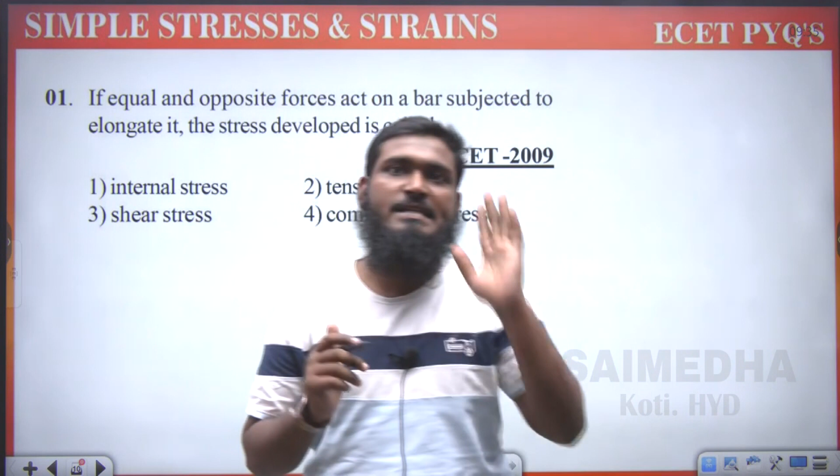Hello everyone, this is Mohammad Inayatullah from the SAIMEDHA Coaching Center Koti, Hyderabad. In this video we are going to discuss all the previous ECET questions, previous year questions, on the topic simple stresses and strains.

In this first chapter we have taken the topic simple stresses and strains, and we have also taken all related topics such as temperature stresses - what are thermal stresses and strains - as well as complex stresses and strains. Those questions will also be covered in this topic itself. So, let us start with simple stresses and strains questions.

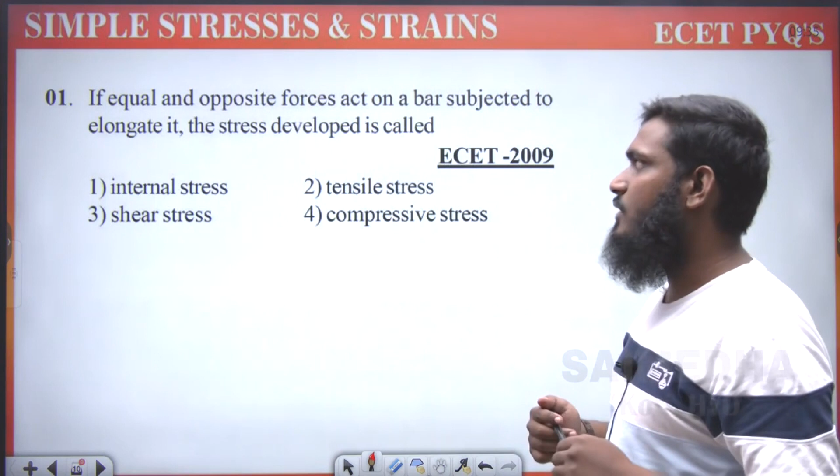The first question is: if equal and opposite forces act on a bar, subjecting it to elongate, the stress developed is called what? Suppose we have taken a bar or a body, and we are applying equal and opposite forces on it - one force applied on the left side, and an equal and opposite force on the other side. If you are applying equal and opposite forces on the bar, which type of stress will be developed?

We have to remember only one point here: whatever loads or forces we apply on the body, if it is trying to pull that body, then it comes under tensile load. Similarly, if we take the reverse - if the load is trying to push the body from the two sides - then it comes under compressive load. But whenever we are trying to pull the body from the two sides, it comes under tensile. So if you have tensile load, which stresses will be induced?

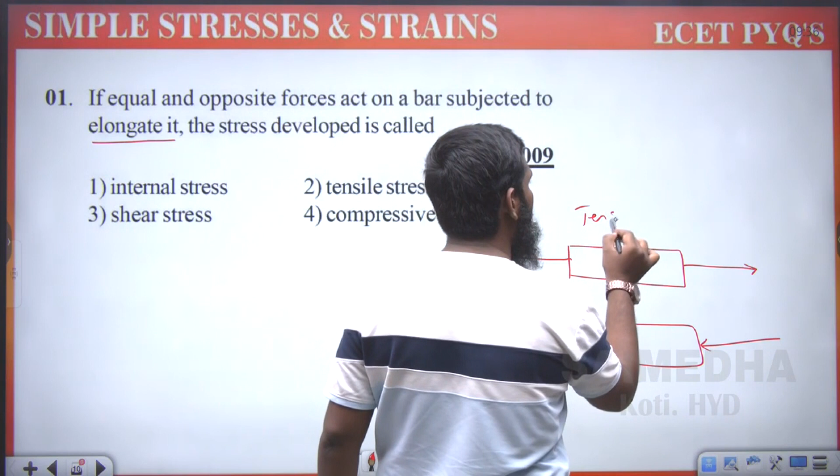Tensile stresses will be developed. Similarly, if you have compressive load, compressive stresses will be developed.

So let us discuss this part. If equal and opposite forces are taken - this force moving in the left direction, and this other force moving in the right direction - two equal and opposite forces - then which type of stress is developed? Directly we can say tensile stress. So option 2 is correct.

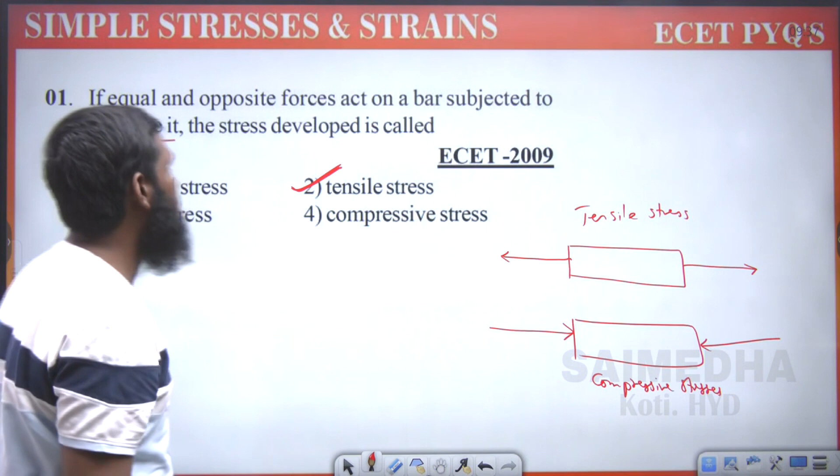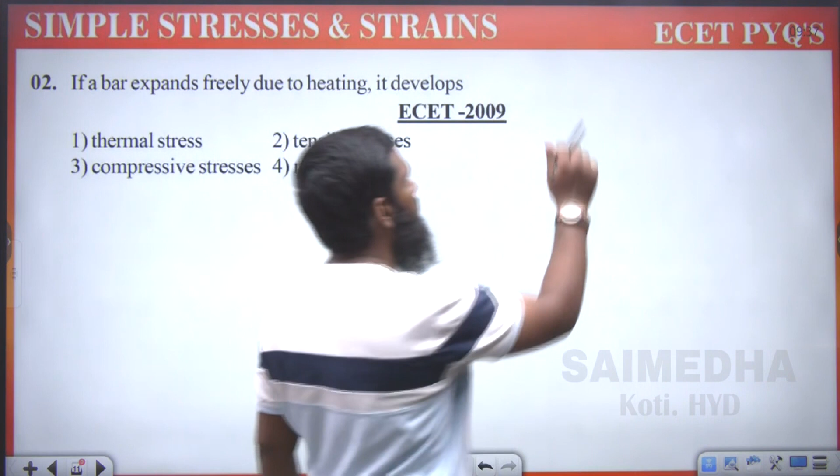Now let us go to the next question: if a bar expands freely due to heating, it develops what? This question will come under the thermal stresses topic - thermal stresses and strains.

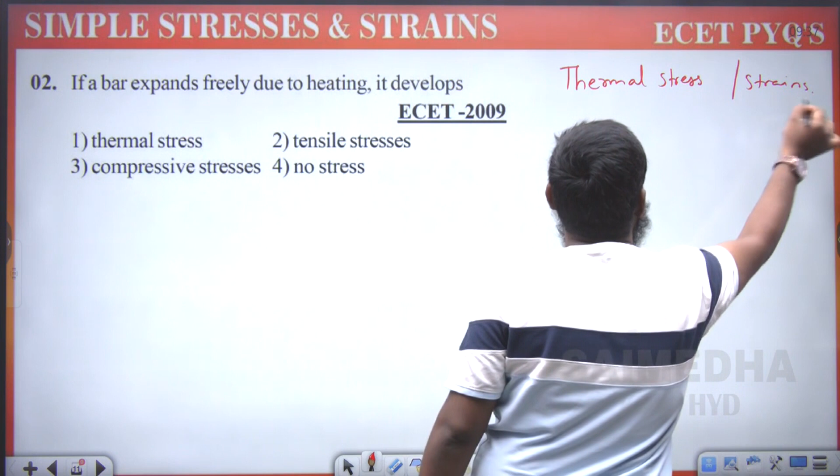Now what is the meaning of these thermal stresses and strains? Now listen here carefully. Suppose we have taken this body over here. Now how are we getting the strain actually? Whenever we are applying the stress, whenever we are applying the load, due to that load stress will be developed. Depending upon that stress, strain will be generated. Strain means what? Change in dimension by original dimension.

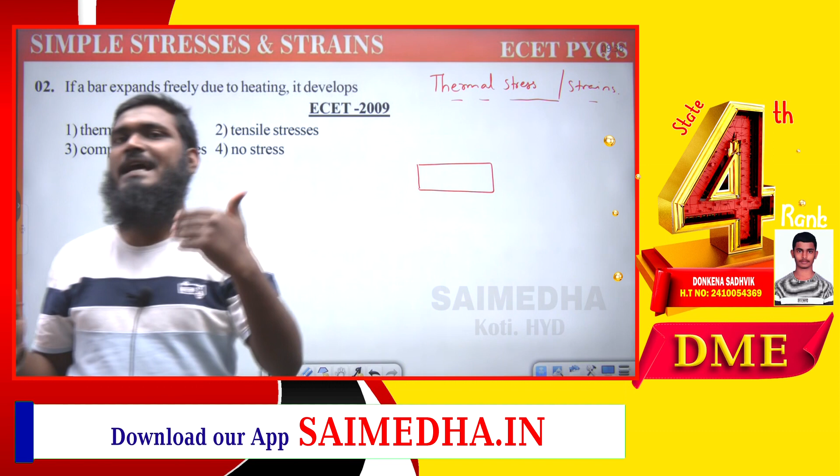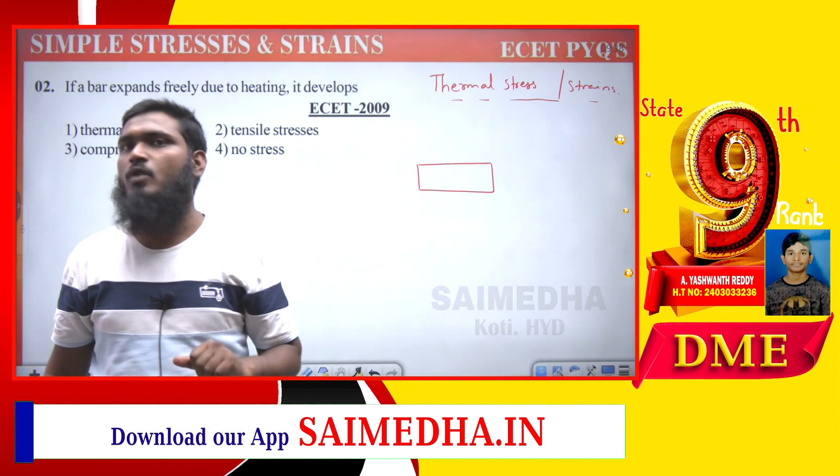So over here, listen carefully to what we are doing. As we know, there is the stress versus strain diagram. In that part we have Hooke's law. Hooke's law means up to the proportionality limit, stress will be directly proportional to strain. Whenever stress is increasing, strain also increases. We have the directly proportional concept there, and that comes under Hooke's law.

But in this, it is not compulsory that whenever the stress is increasing, strain should increase. We are not having that condition. Whenever we are considering Hooke's law, that is the condition: stress is directly proportional to strain. But if you are going out of this content, taking some other content, we are discussing thermal stresses or strain.

Now in this part we are not applying any load over here. If you are not applying any load, we are not having any type of stress. So what we are doing, we are heating this bar. It is given clearly in the question that whenever we are heating this bar or body, due to the temperature changes, we are having strain in the body.

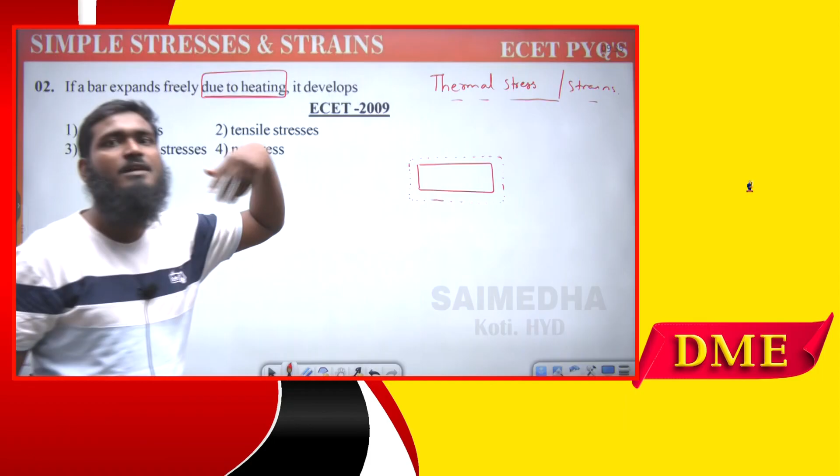What is the meaning of strain now? Strain means change in dimension by original dimension. Whether it is extending or contracting, leave that part, that is secondary. What is the primary point over here? Whenever we are heating that bar or body, due to that heat, the body has strain values. Strain means we have some changes in the dimensions.

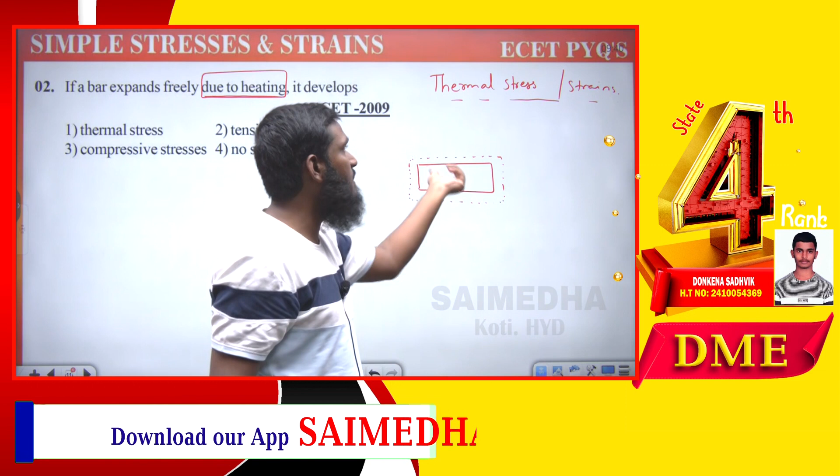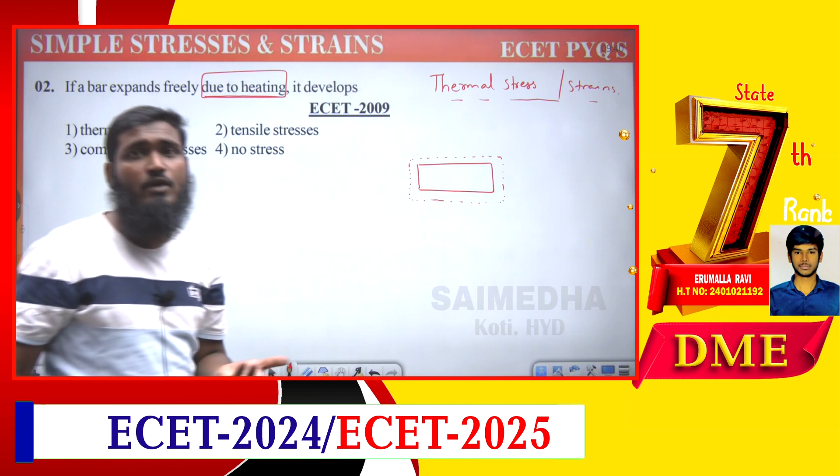So we are not considering any Hooke's law over here. Apart from Hooke's law, this concept comes under thermal stresses. As we are having strain over here, we are not having any stress. So that's why the topic comes under thermal stresses or thermal strains.

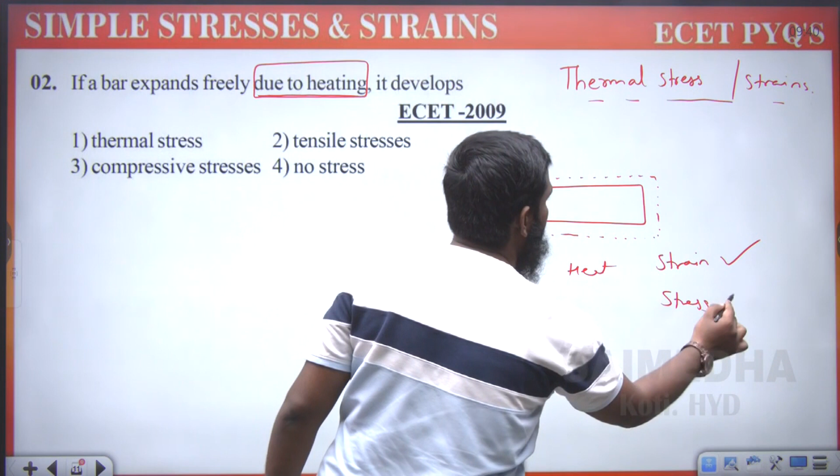So let us see the options we have over here. It develops thermal stress, it develops tensile stresses, compressive stresses, no stresses. Just now we discussed that whenever we are heating this part, we are getting only strain, but we are not getting a stress value. We are not getting any stress, so we can write: it develops no stress.

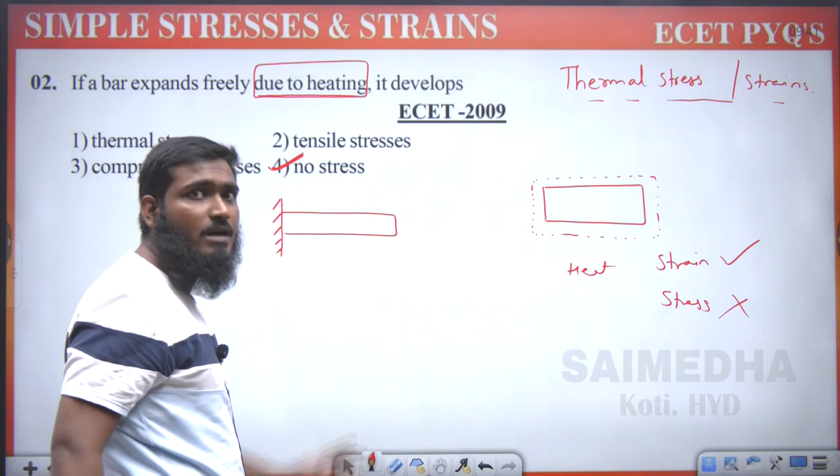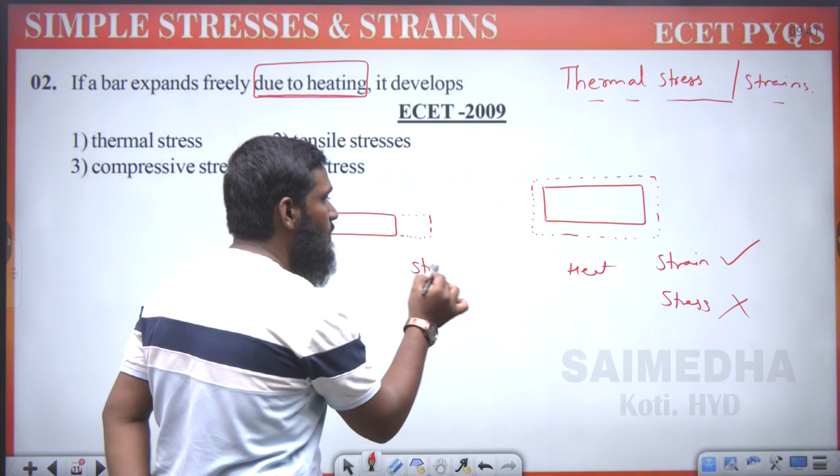So whenever we are heating this, the bar or rod is trying to change its dimension. Whenever it has changes in the dimensions, we can say strain has some value. Strain is not equal to 0, but stress is equal to 0 in this context we have taken.

Now what is happening means, suppose we have taken a rod, but that rod is fixed at both the ends. What example have we taken? We have taken the bar and it is fixed at both the ends. Whenever we are heating this rod or bar, it is trying to change its dimensions, but as it is fixed at this end, in practice it is not able to make the changes. So it is trying to change the dimensions, but due to this fixed end, it is not happening practically.

So if it is not happening practically, what is resisting there? Due to this part, it is applying some compressive stress over here. Due to that compressive stress, the stress is generating because it is restricting. As it is restricting, stress will be developed, and that is a compressive stress, because if it is trying to elongate, with the help of this fixed end it is trying to contract. Whenever it is trying to contract that rod, we call it compressive stress. You have already learned this topic in the video lectures.

So as an overview, whenever we have a free end, it can elongate. So strain is not equal to 0, we have some strain value, but stress will be 0. But as we have a fixed end, compressive stress will be developed. But in this question, no fixed end or free end is mentioned; what is given is that the bar expands freely. If the bar is expanding freely, we do not have any stresses, only strain. So we can go with the fourth option, which is no stresses.

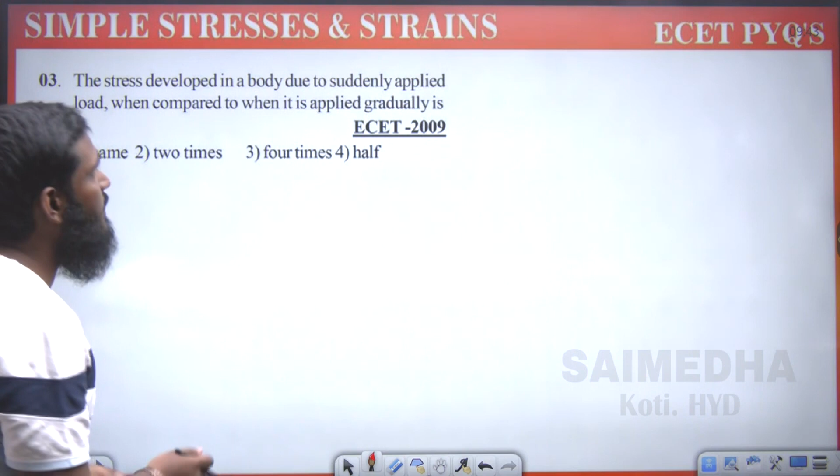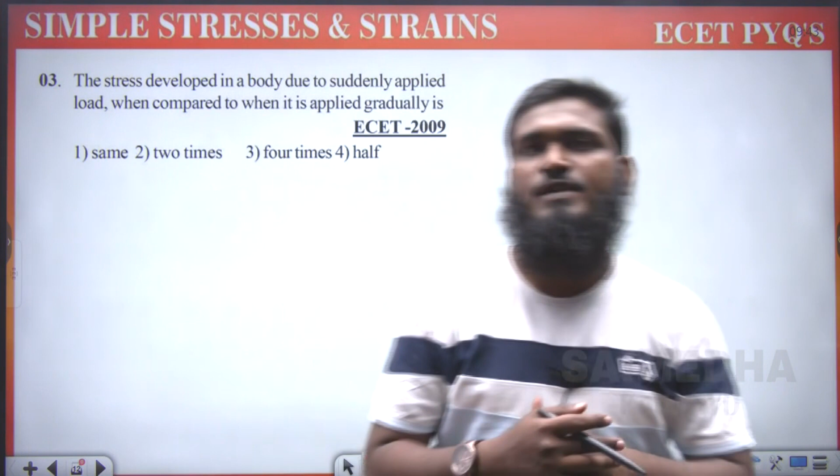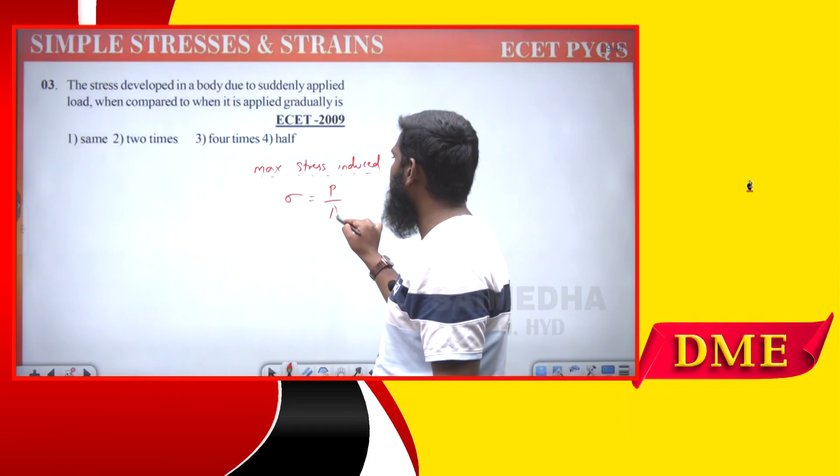Now next part: the stress developed in a body due to suddenly applied load when compared to gradually applied load. We take this topic as strain energy, which we covered in this first chapter. Let us see the maximum stress induced in a body. Listen carefully. In the first case, the maximum stress induced is sigma equals P by A. This is for gradually applied load.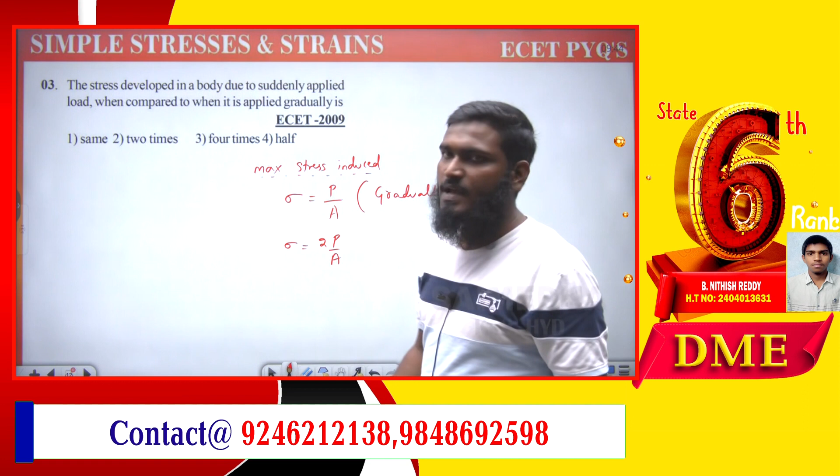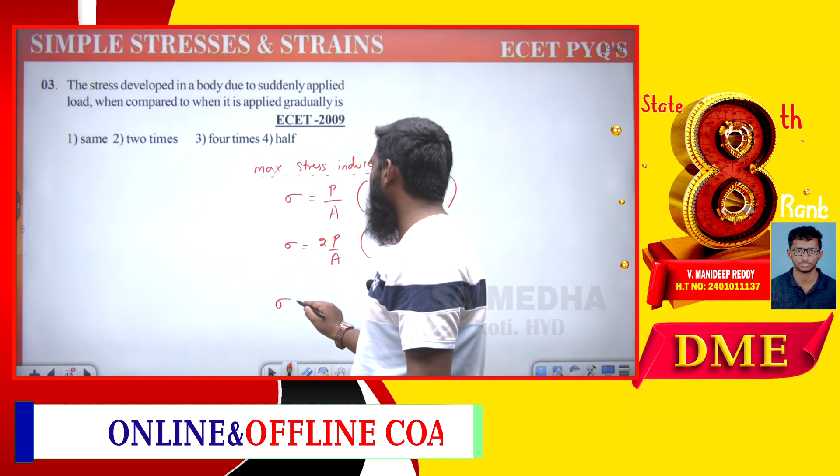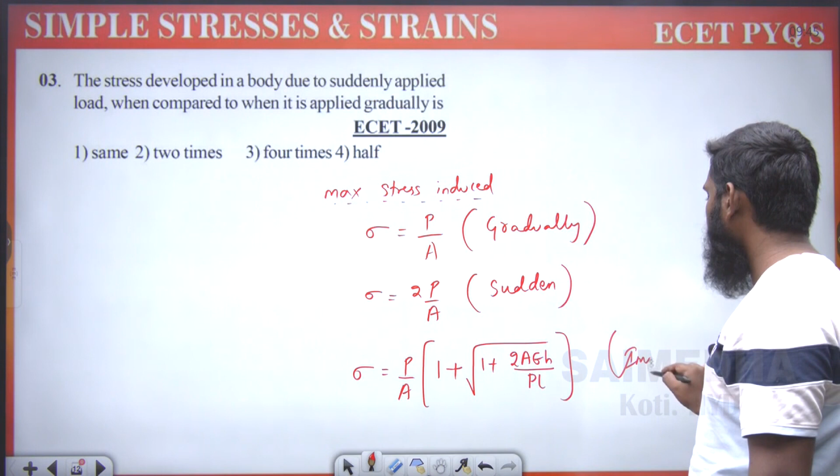Similarly, if sigma equals 2 into P by A, then this is a suddenly applied load. One more formula we have is sigma equals P by A of 1 plus under root 1 plus 2AEH divided by PL, and this formula is for impact load. So gradually applied load gives P by A, suddenly applied load gives 2 into P by A, two times the gradually applied load, and impact load gives P by A of 1 plus under root 1 plus 2AEH by PL.

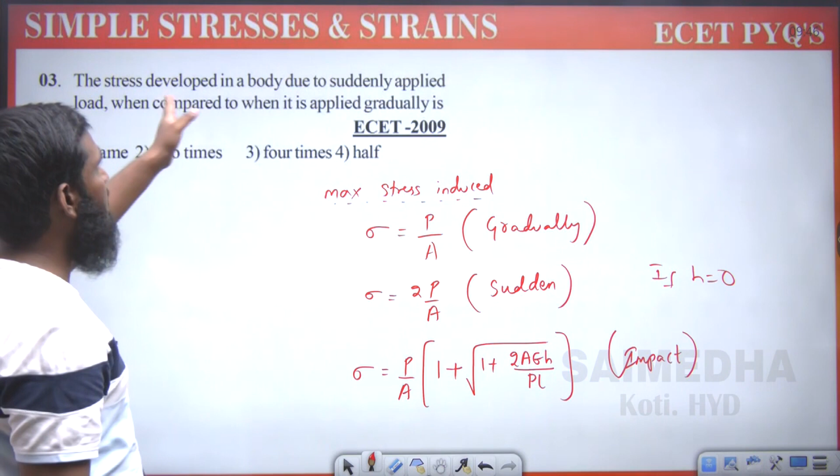Now there is a similarity between suddenly applied load and impact load. Listen carefully. If H equals 0, then 0 into this complete part is 0, 0 divided by PL is 0, 0 plus 1 is 1, root 1 is 1, 1 plus 1 is 2, so we get 2 into P by A. So for the impact load formula, if H equals 0, it becomes suddenly applied load. So in this question, the stress developed in a body due to suddenly applied load when compared to gradually applied load means what?

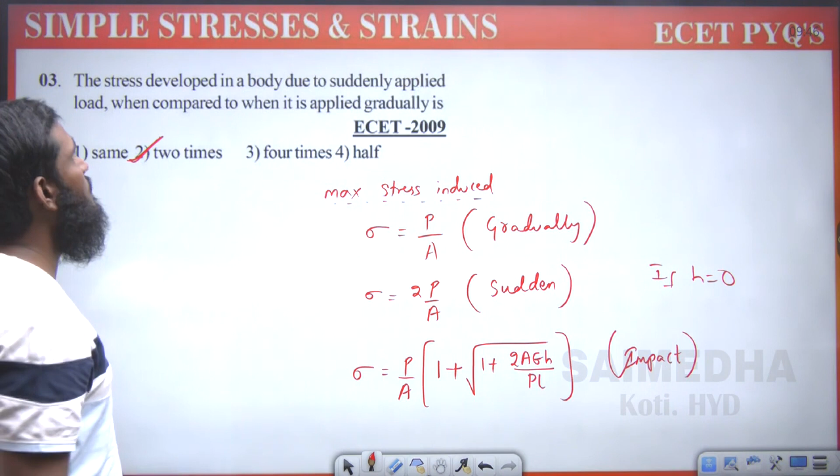Twice means 2 times. 2 times we are taking over here, means let us go with the second option. Second option, 2 times is given over here. So let us go with 2 times the gradually applied load. Okay. So this was the option.

Now next question, breaking stress is. Now what is the meaning of breaking stress actually? Breaking point, failure point, rupture point, we are having this part now. So let us try to discuss over here by using the diagram. Stress strain diagram will be there. By using the diagram, let us understand this part. So breaking stress is less than ultimate stress, greater than ultimate stress, equal to ultimate stress, less than working stress.

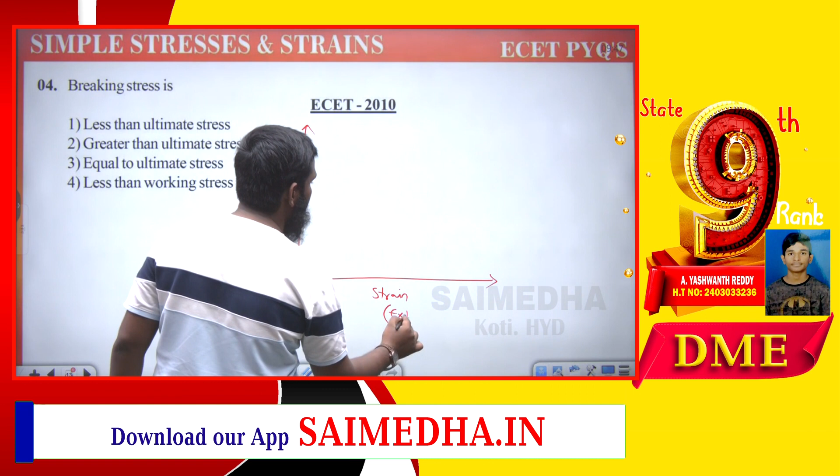Okay. So we have taken this diagram. On the y axis we are taking stress. Stress means we are taking it as load over here. And this part we are taking as strain. Strain means we are taking this part as extension. Now let us draw the diagram. Suppose this diagram we are taking. This is a straight line we have taken. Okay, this is the diagram we have taken over here. So for stress and strain, we are having this diagram.

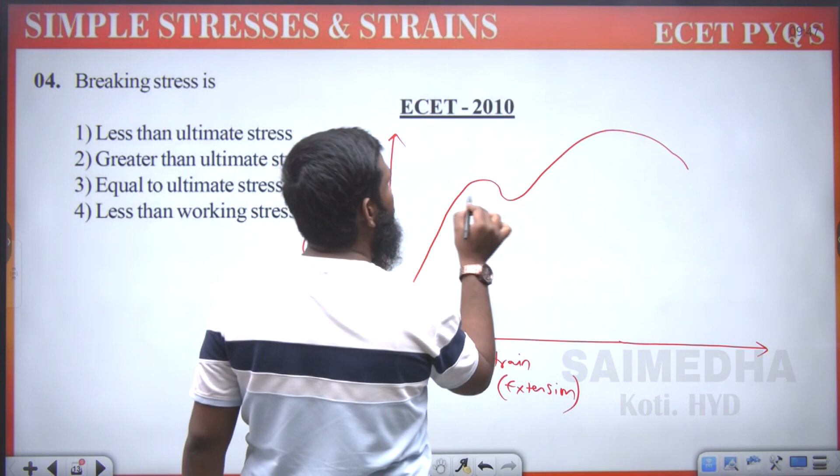Now let us mark the points we are having over here. What are the points we are having? Suppose this is a point we have taken. This is one point, this is one point, this is one point, this is one point, then again this point, and this is the last point. Okay, like this we have taken. So this is A, B, C, D, E, F. Okay, so all these points we have taken over here.

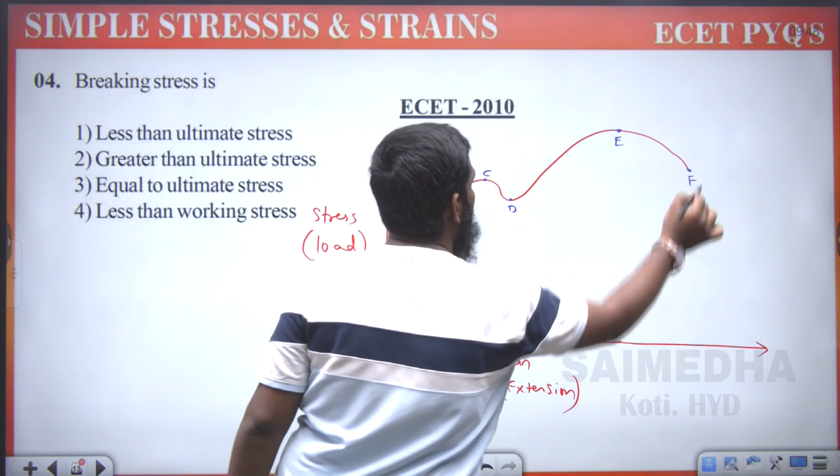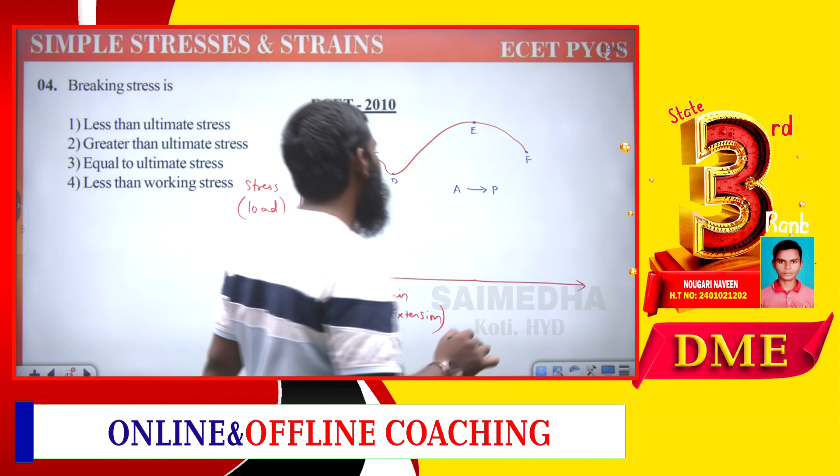Now what is the meaning of these points? So first point, listen here carefully, A point. From O to A, it is looking like a straight line. So whenever we are having a straight line, what is the meaning? Straight line means stress is directly proportional to strain. Whenever the stress value is increasing, strain is also increasing up to the proportional limit. Up to proportional limit, we are calling that law Hooke's law. So up to A we are calling this part the proportional limit. Let us write over here, proportional limit.

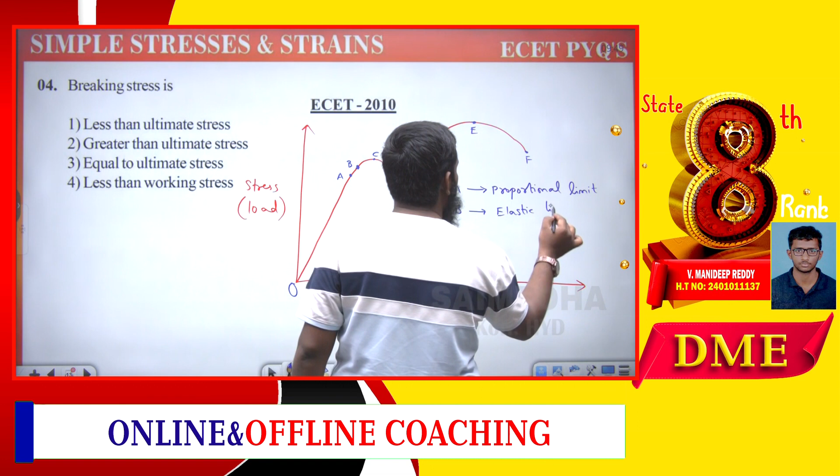Now what is B we are having? B we are taking as elastic limit. Now what is elastic limit? Up to point B, if you are applying the load, stress will be developed. Due to stress, strain will be developed. But after removing the load, if the body is regaining its original shape and size, if it has the capability to regain its original shape and size after removal of the load, then that property we are calling elasticity. So this is the last limit, point B, we are calling it elastic limit.

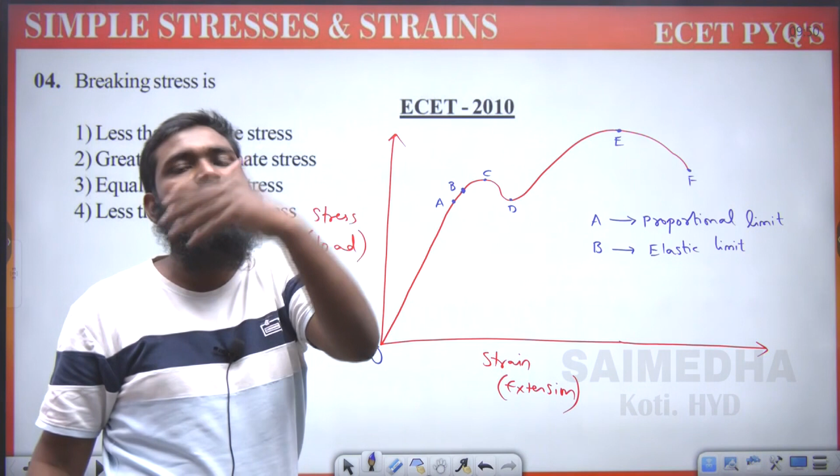In this region, from O to B, if the body is loaded and you remove the load and it has the capability to regain its original shape and size, then we call it elasticity. Means we are calling this region the elastic region.

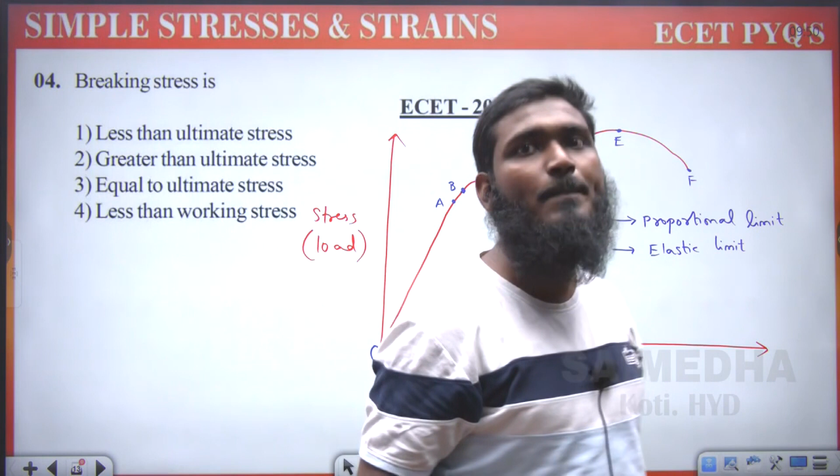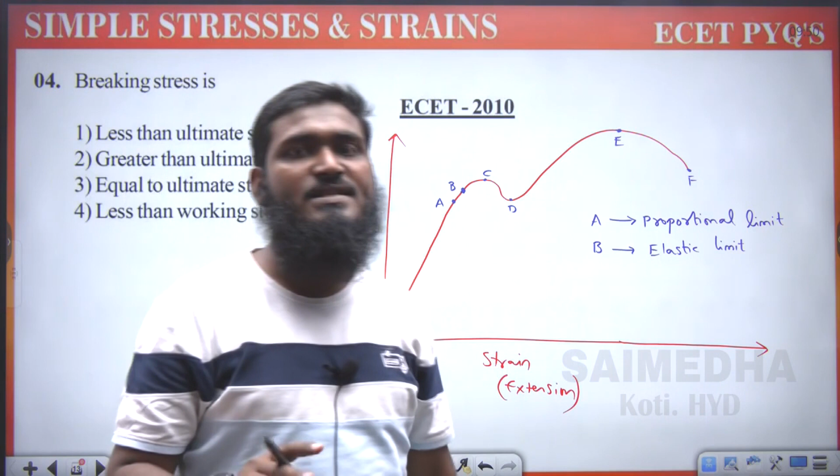Now whenever it is crossing point B, this complete region will be coming under the plastic region. What is the meaning of plasticity? Plasticity means after removing the load also, the body does not have the capability to regain its original shape and size. Then we are calling that part plasticity, means permanent deformation. It will be permanently deformed. So point B we have taken. Now what is point C? Point C we are taking as the upper yield point.

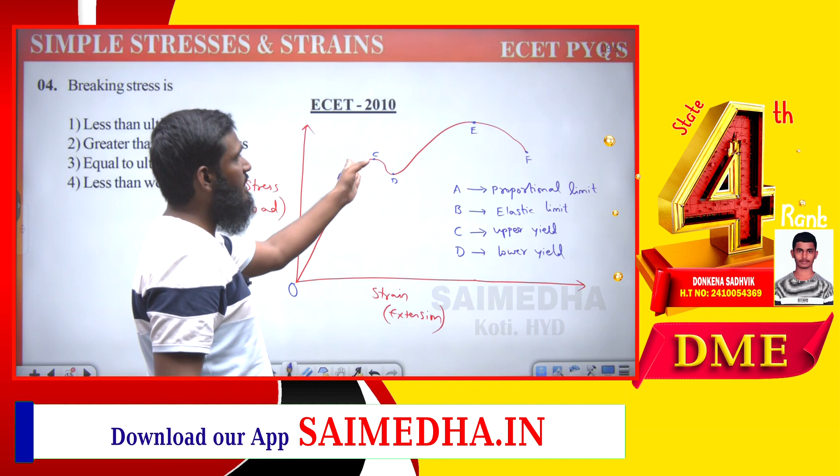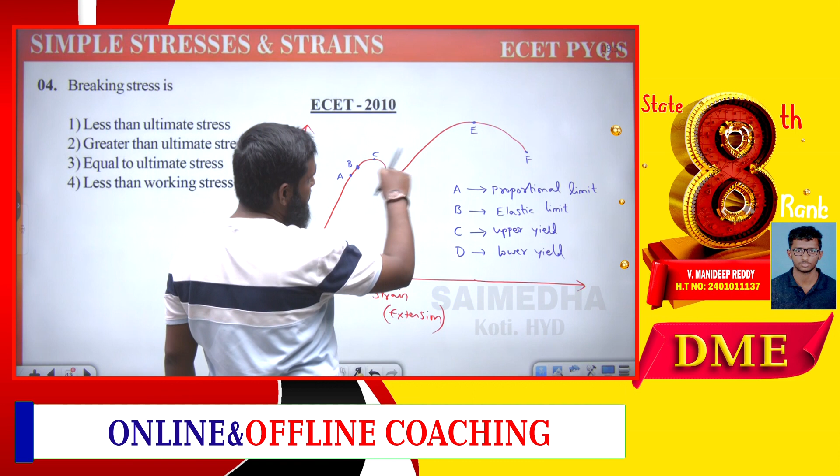Okay, upper yield point or upper yield limit. Now next, D we are taking as the lower yield point. Now after this elastic limit, whenever we go on increasing beyond point B, what are we getting? Yield points. We call this part the upper yield point and lower yield point. We'll be having more increase in the strain here. Even if you decrease the stress, we get more strain there.

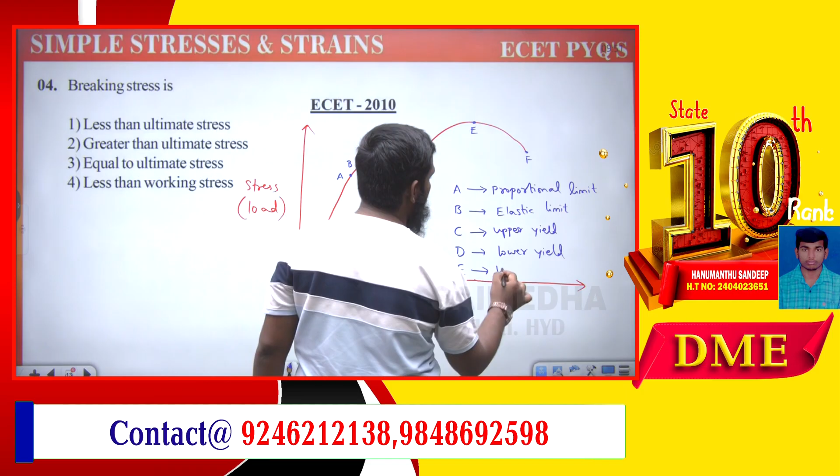Now next we are taking point E. Point E we take as the ultimate point or ultimate stress. At that ultimate point, what are we having? Ultimate stress. Now F we call the breaking point or failure point.

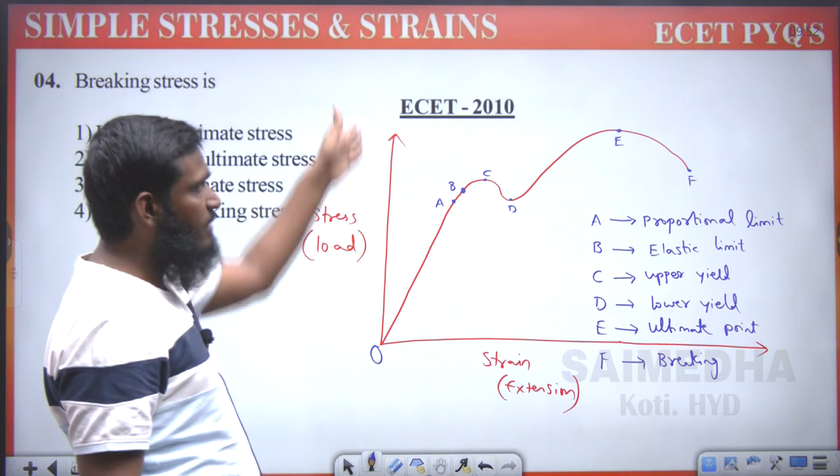Now let us see the question we have here. Breaking stress is... These are the stress values. We start from 0 and it goes on increasing. Now let us see a simple point here. What are we having here? Ultimate stress. So we have the ultimate stress value here.

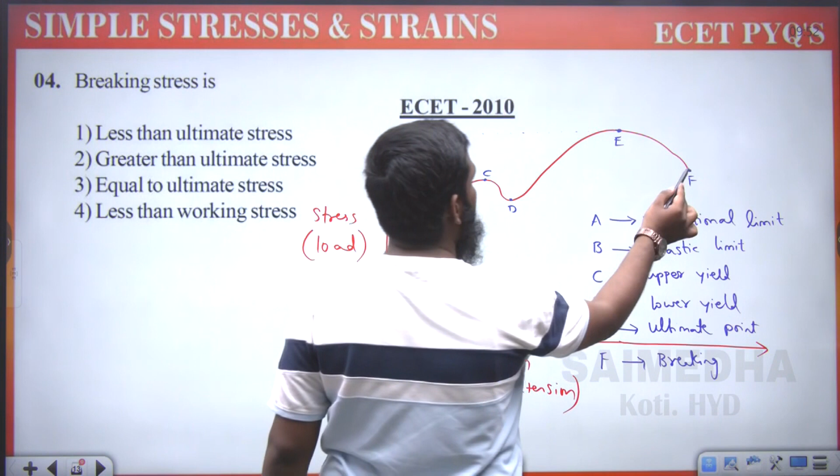And what is this value? Breaking stress. So is the breaking stress value more than or less than the ultimate stress? We can directly see it here. This is ultimate stress and this is breaking stress. So breaking stress is less than ultimate stress. So we can go with the first option: breaking stress is less than ultimate stress. The first option is correct.

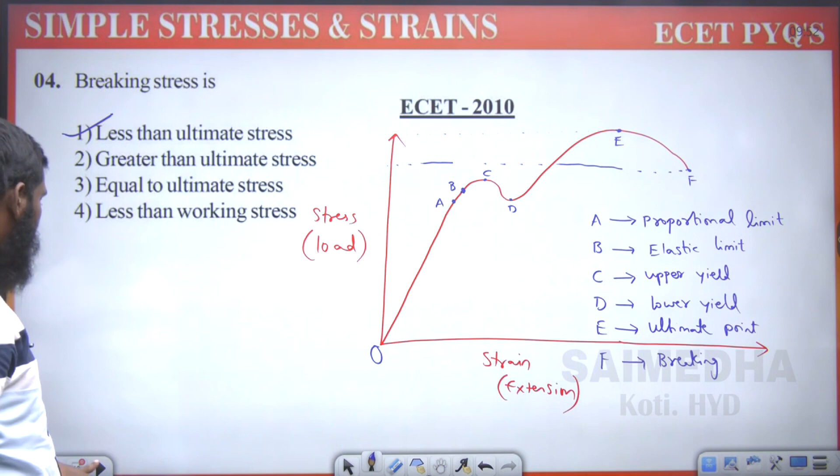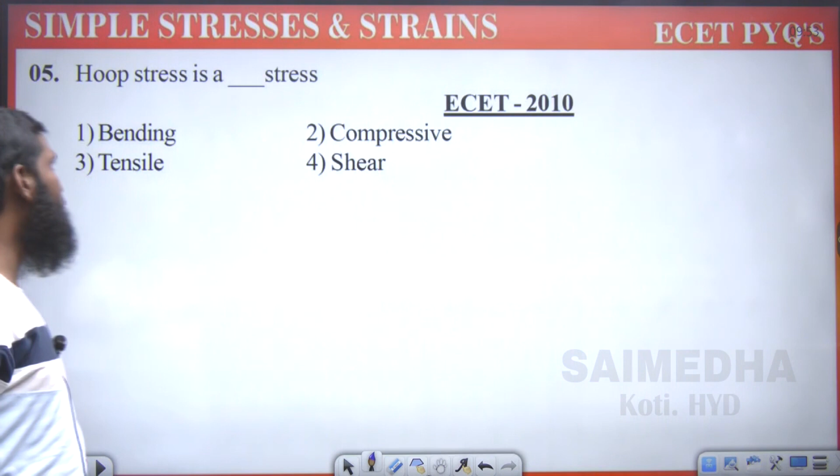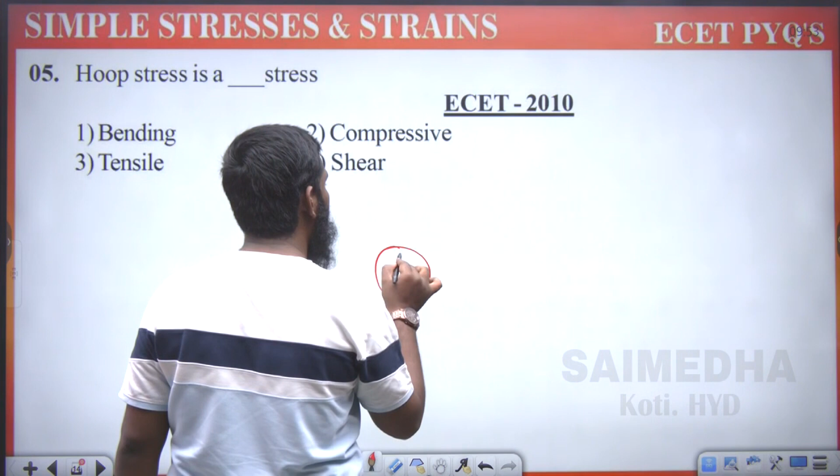Now let us see the next question. Hoop stress is a dash stress, meaning which type of stress? This question is also very important and it is repeated. The options are bending, compressive, tensile or shear. Let us take one example. Suppose we have taken one cylinder, and in this cylinder we are trying to fill gas.

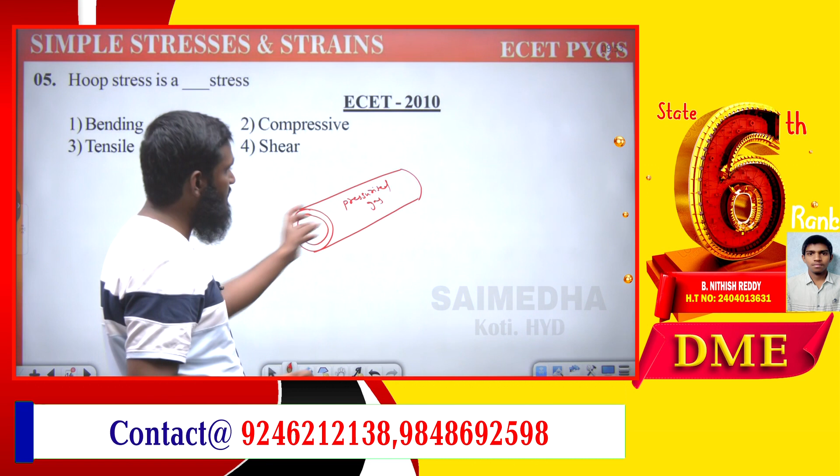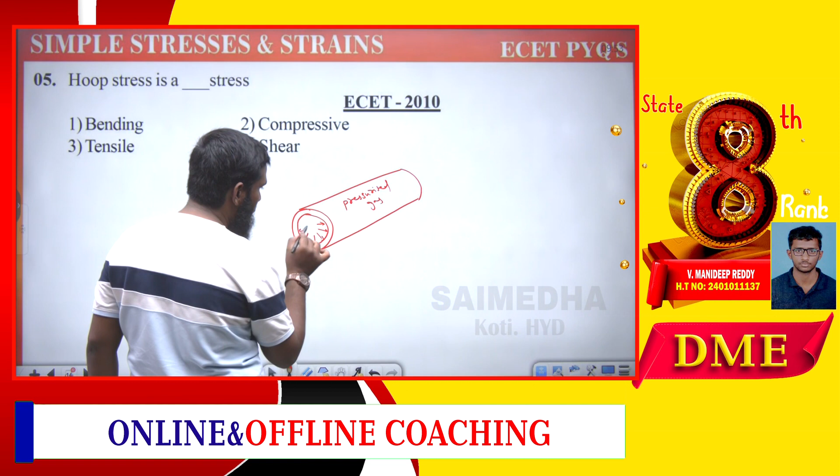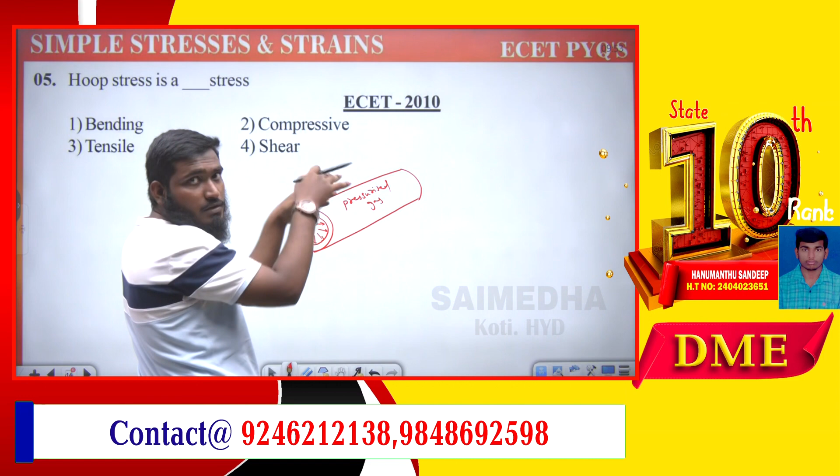Pressurized gas. If you fill the gas in this part, what will happen? Whenever the gas moves inside, it tries to occupy all the space it has. As it occupies all the space, it attaches to the walls, the outer surface, and completely fills up this space. So if you see these arrows here, what is the meaning of this?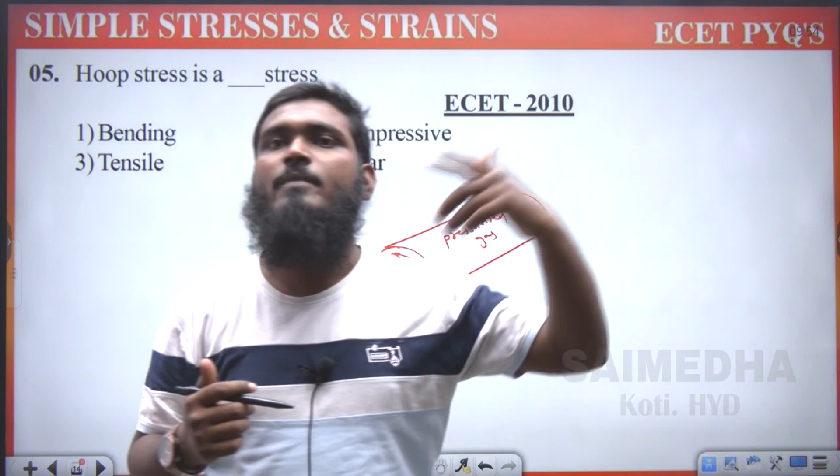It means whenever it is getting filled, it is trying to elongate. Elongation means increase in length, increase in dimension. We get that increase in dimension when we use a tensile load. Whenever tensile load is applied, we have some increase in dimensions. But whenever we apply a compressive load, we get shortening, meaning a decrease in dimensions.

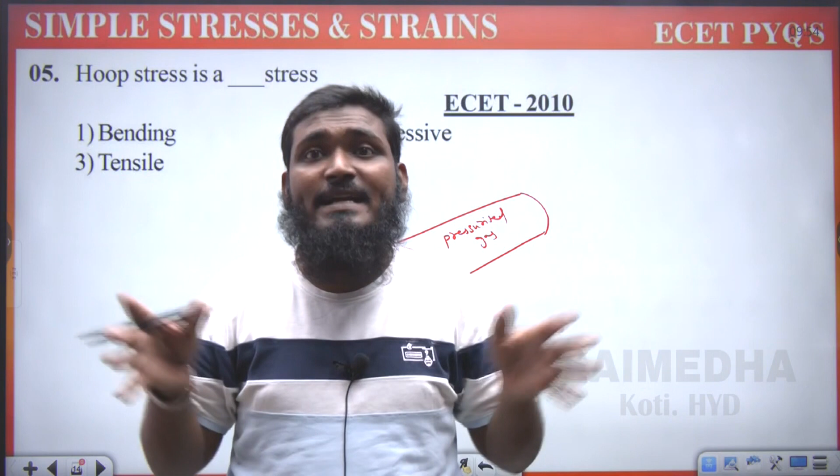So here also, whenever we fill this pressurized gas, the gas occupies whatever space we have and tries to elongate that part. If it tries to elongate, a tensile load is applied. If a tensile load is applied, which stress? Tensile stress. So what do we call this stress? Hoop stress.

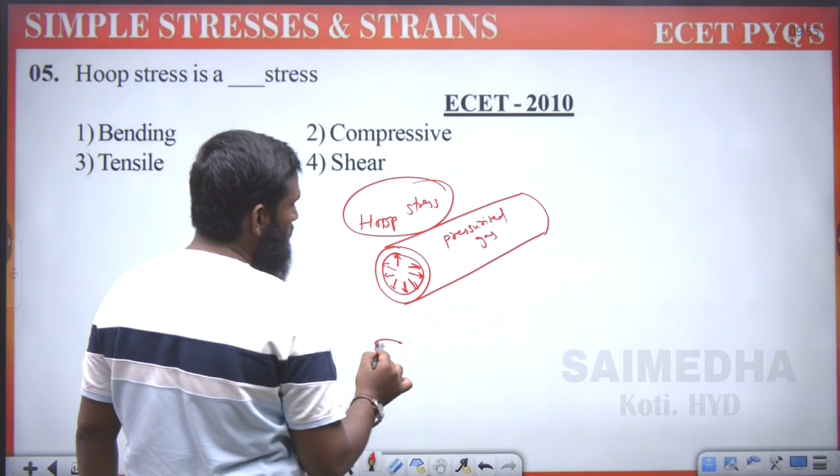Hoop stress, and we are having one formula over here: sigma h, hoop stress, is equal to PD by 2T. Okay, by using the formula also, if you want to find out any value over here, we can find out with the help of this formula, PD by 2T. Okay, now which option will be correct over here for this question?

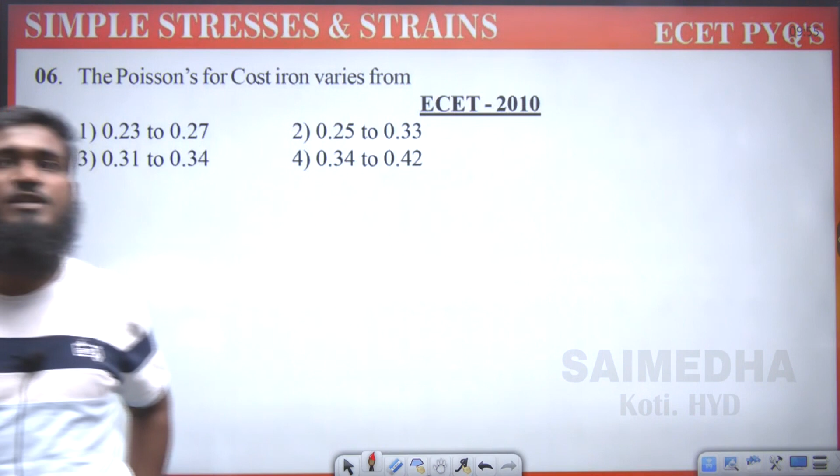Hoop stress is a dash stress: bending, compressive, tensile, shear. Let us go with tensile over here, tensile stress. Okay, so option 3 is correct. Now next question, the Poisson's values for cast iron varies from. Now this is also most important. A number of times the Poisson's value has been asked in the examination. Okay, now let us see. Let us discuss what are the complete values we are having.

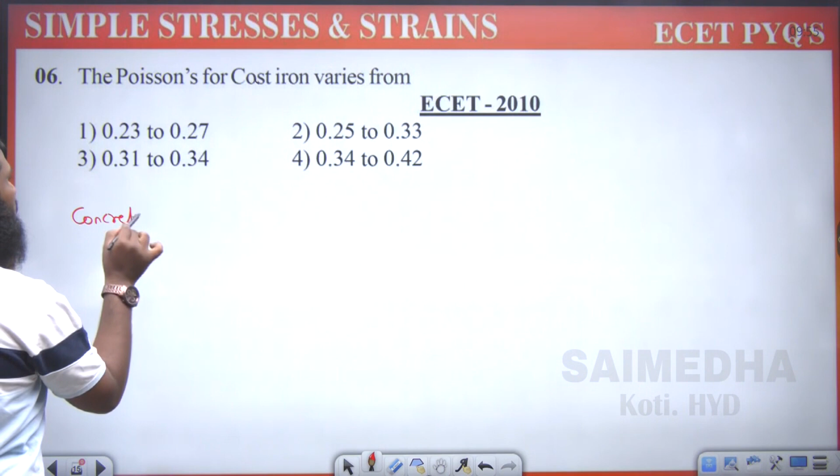So first let us take concrete. For concrete, the Poisson value we are having is 0.2. Okay, what we are having? 0.2. Now next let us take cast iron. If you are taking cast iron, approximately we are having it as 0.23. Okay, this part we have taken. Now next we are taking steel. If you are taking steel over here, this is like 0.25 to 0.33. Okay, like this we have taken 0.33.

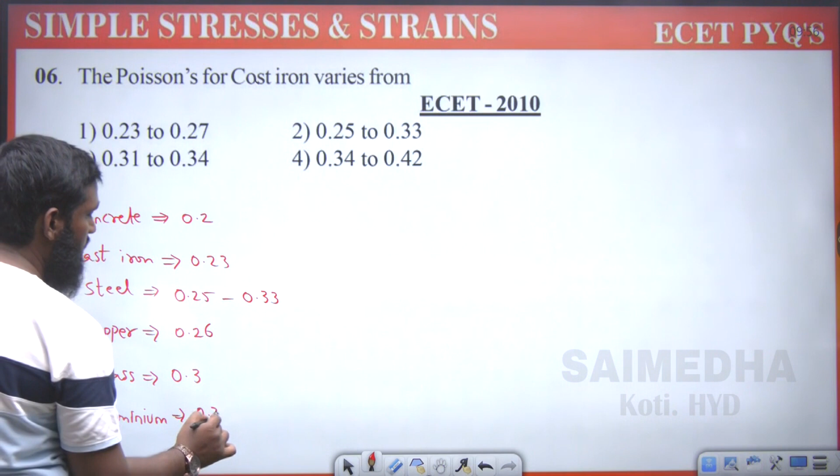Now if you are going for copper, the value is like 0.26. 0.26 we have taken. Now if you are taking brass over here, it is like 0.26 to 0.3. Now if you are taking aluminium, it is like 0.32. Okay, 0.32. Similarly, if you are taking rubber, then it is like 0.5. Okay, for rubber we are having the value as 0.5.

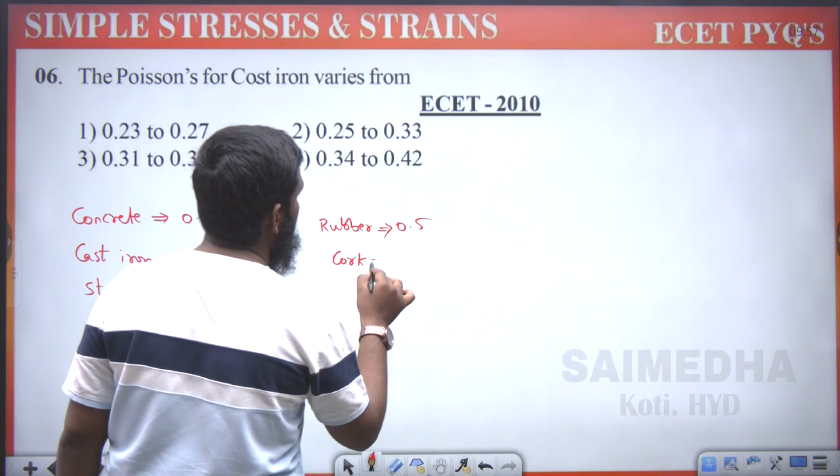0.5. Now next, cork will be there. Okay, for cork we can't take any value, it is like 0. Okay, cork, like this value we have taken. Now let us see the question what we are having over here. The Poisson's value for cast iron. Cast iron means what we have taken over here? Cast iron means 0.23. Where we are having 0.23? 0.23 means 0.23 to 0.27, which means the first option. First option is correct.

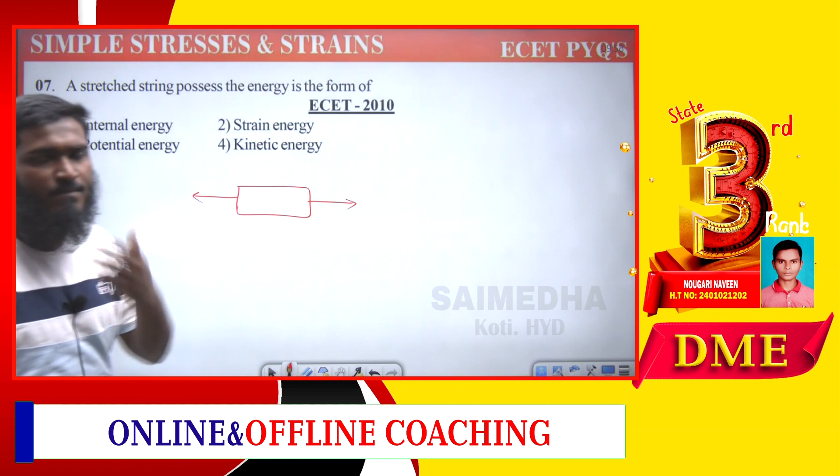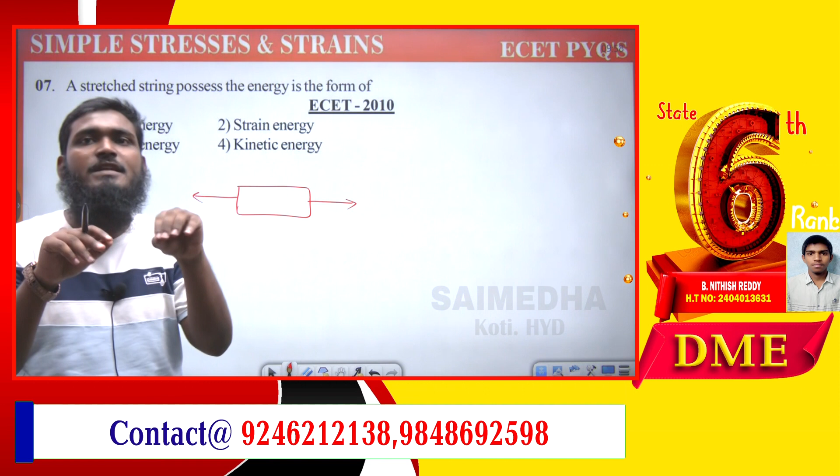Now next, a stretched string possesses the energy in the form of internal energy, strain energy, potential energy or kinetic energy. Okay, so what will happen whenever the body is strained? Suppose this is a body we are having, and if you are applying some load over here, whatever the load may be, there will be strain in the body. So whenever the body is strained, the energy will be stored due to that straining effect. Okay, so this part we are taking over here.

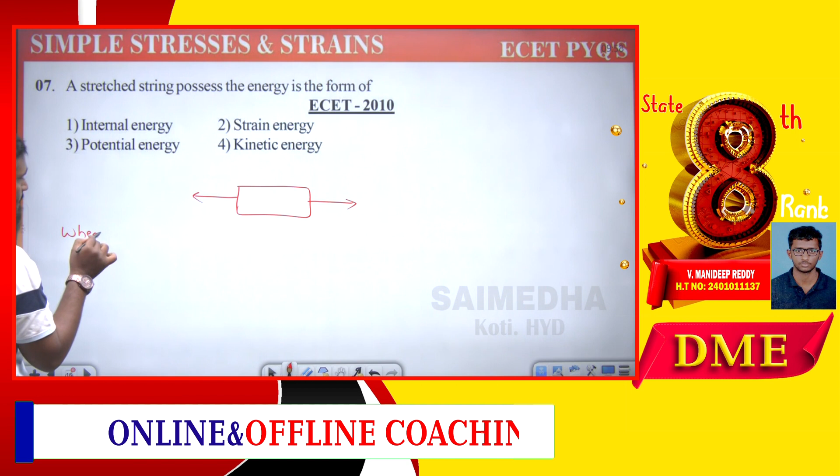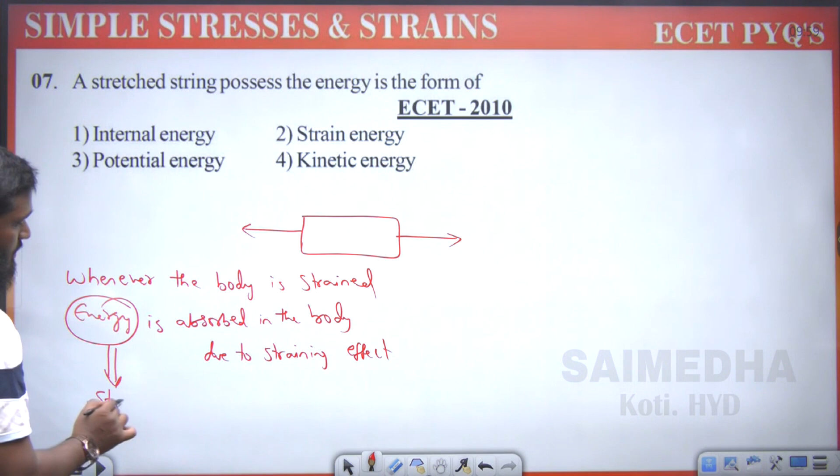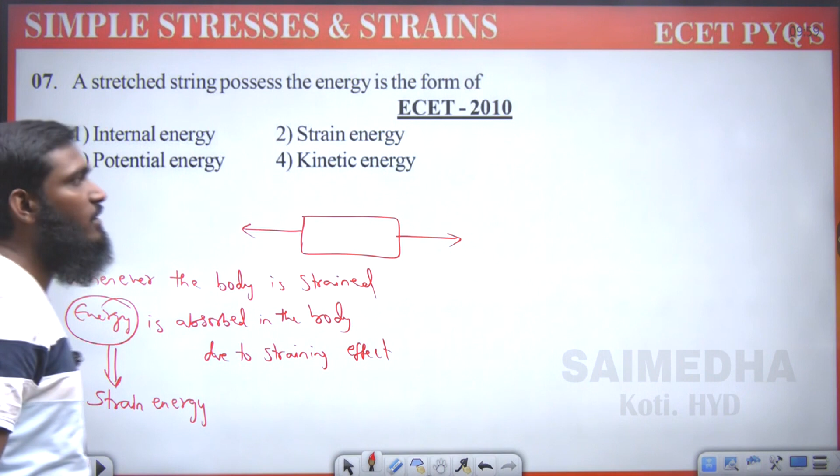So in this part, let us see this one: whenever the body is strained, energy is absorbed in the body due to straining effect. So this energy which is absorbed over here, we are calling it strain energy. Okay, so which option will be correct now? Internal energy, strain energy, potential energy, or kinetic energy? Let us go with the second option, strain energy.